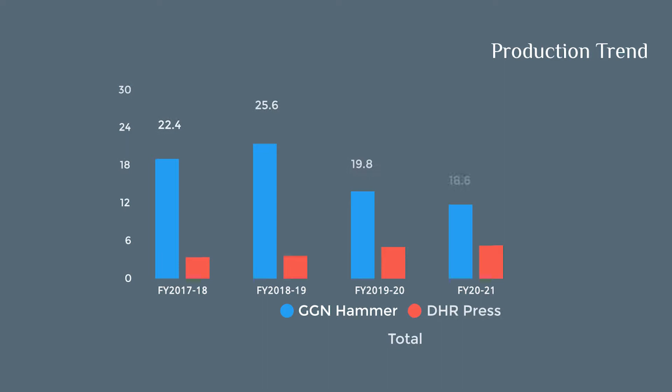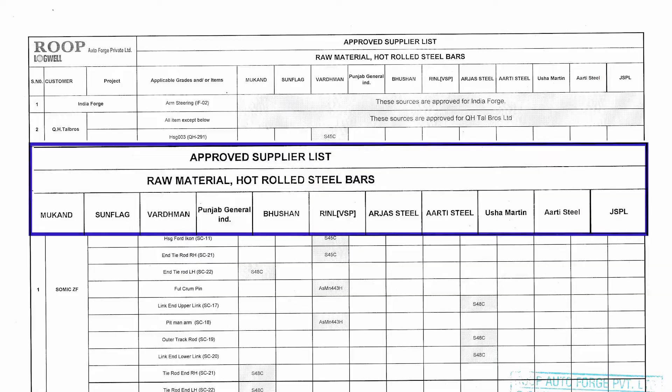We receive raw material bars as per our technical delivery condition from customer approved sources. A total of 30 different grades of raw material is received at Roop Auto Forge for further processing.

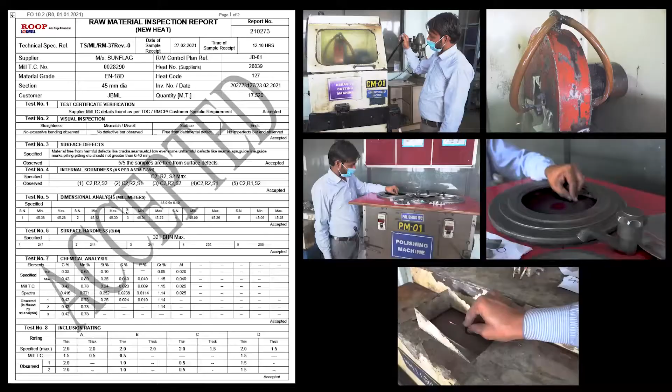Raw material is stored under shed to prevent it from rust. For raw material approval, we are capable of conducting 27 different types of tests. Centralized FIFO boards are maintained for all raw material grade and sections along with raw material stock.

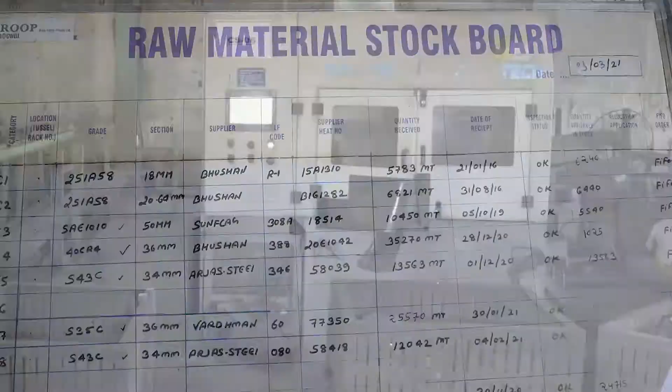Our shearing facility is equipped with 4 shearing presses, a circular saw and a band saw. In-house tool room is equipped with vertical milling machines to manufacture all tools and dies.

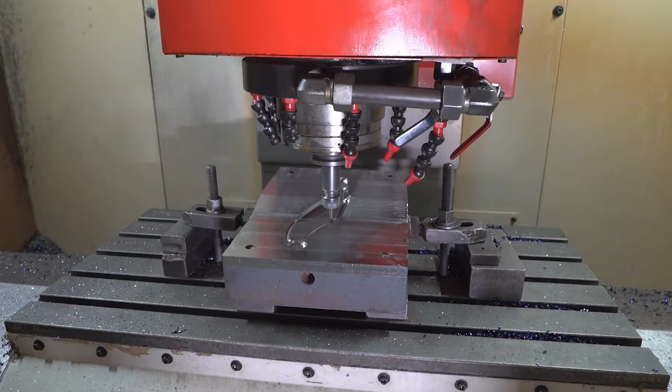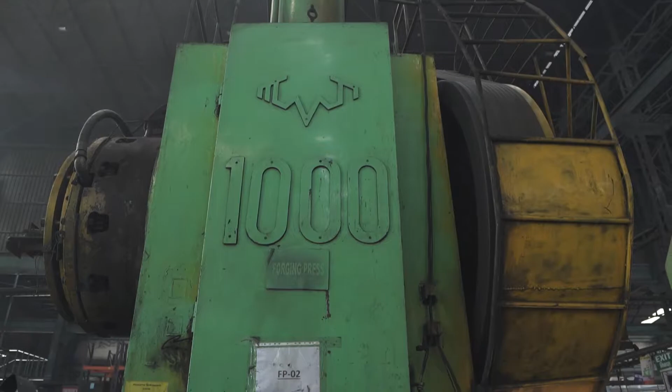Our forging facility is equipped with 5 presses starting from 750 tons to 1600 tons and 7 hammers ranging from 1 ton to 2 ton to cater to different demands of the customer, for a part weight ranging from 60 grams to 8 kgs. Our forging facility is equipped with induction heaters.

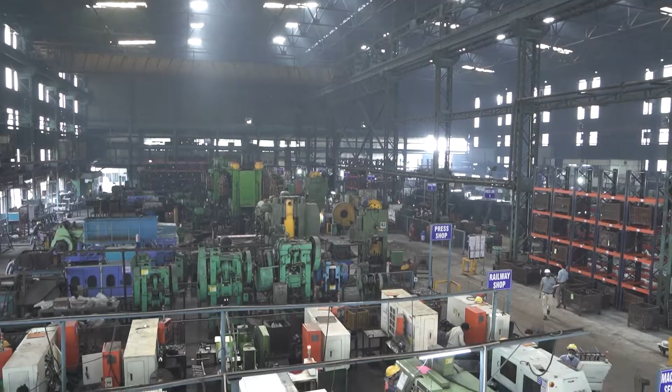After heating, billets are automatically segregated for overheat and underheat using double color infrared radiation pyrometer.

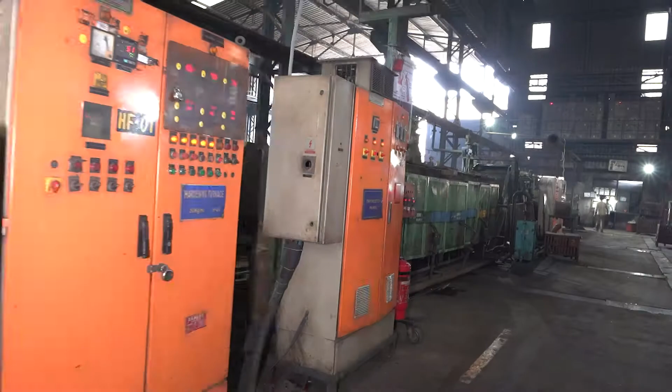We have conveyorized continuous furnace to meet our heat treatment requirements. Our furnaces are equipped with multiple convector motors to maintain uniform temperature inside the furnace.

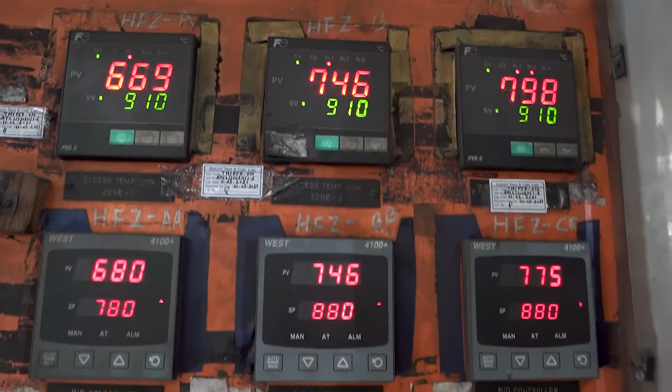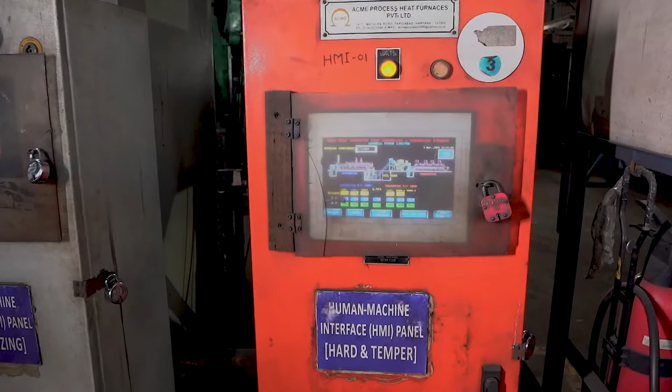In our heat treatment furnace, human intervention is minimized with the help of human machine interface, HMI. It governs and records the furnace operation, alarms and data using 35 different sensors.

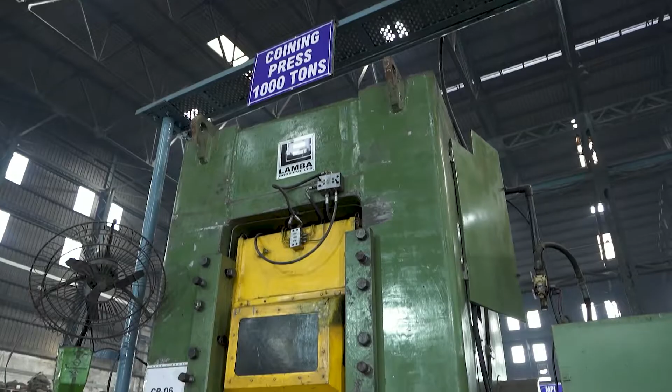Post heat treatment, parts are taken for shot blasting, fettling and coining before they are subjected to final inspection. We are doing visual inspection for crack, underfill, short fill issues, and also conducting dimensional check for OK, oversized and undersized parts.

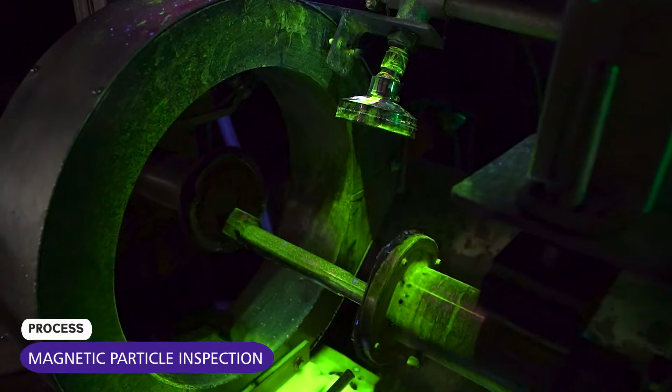All parts produced in Roop Auto Forge are checked using magnetic particle inspection to avoid customer complaints for crack.

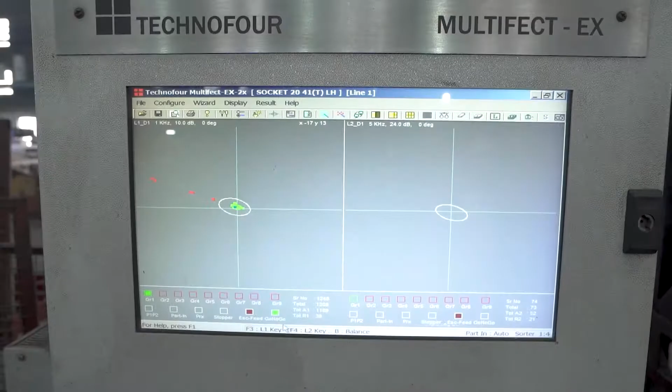We have state-of-art eddy current testing machines with auto gate sorter for hardness, material grade mix-up, and wrong heat treatment. We also have ultrasonic testing facility to detect internal cracks.

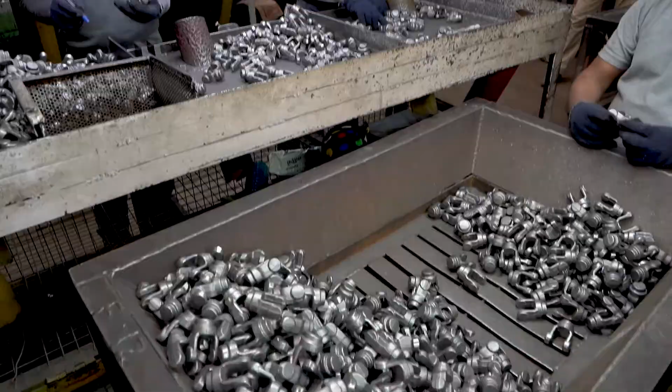Limit samples are used, displayed at required station. Our machining section is equipped with SPMs and CNCs based on customer machining requirement.

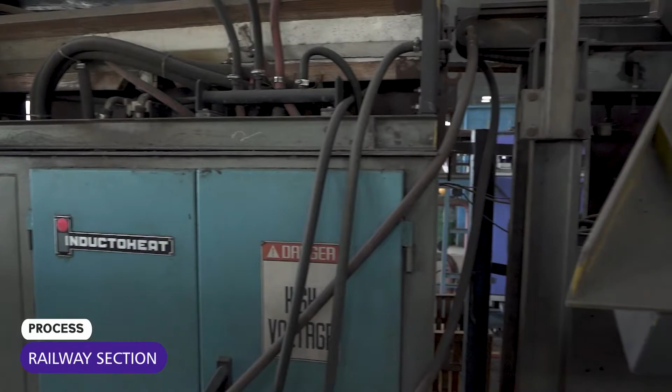We have a dedicated railway clip manufacturing line from where we have catered to Indian Railways as well as international customers like Sri Lankan Railway, Korean Railway as well.

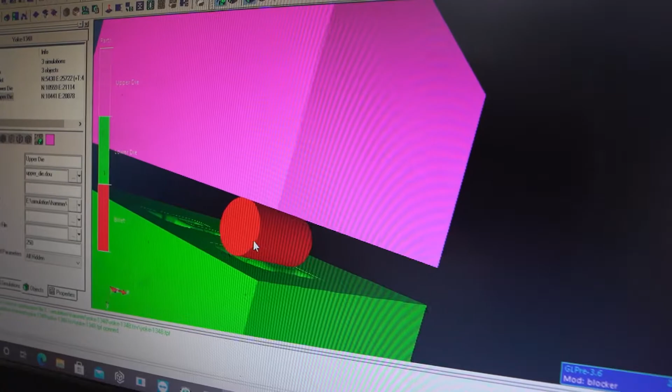We develop 3D models for parts using Unigraphics and Forge 11 simulation software to optimize the die and tool design for smooth grain flow, input weight, and to reduce defects such as underfilling, fold, lap, etc.

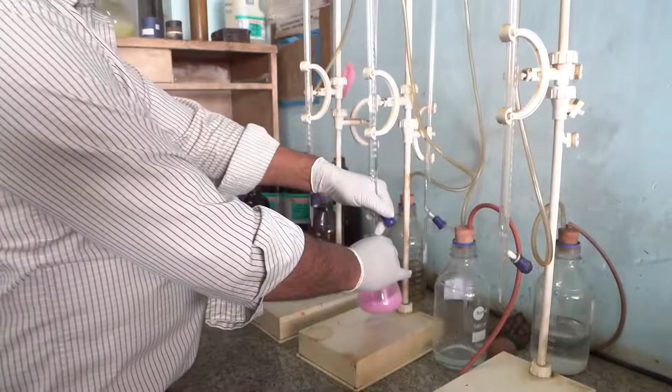Fully equipped lab is available in Roop Auto Forge for conducting destructive and non-destructive tests such as chemical composition, hardness, microstructure, grain size, inclusion rating, Jominy hardenability, grain flow, etc.

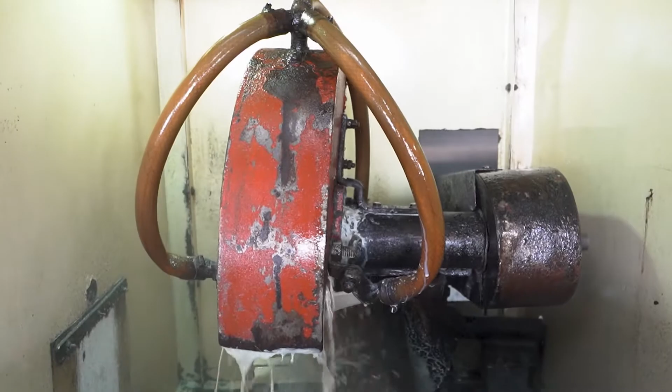Specimens of raw material and heat-treated parts are stored for an identified period and revalidated every year.

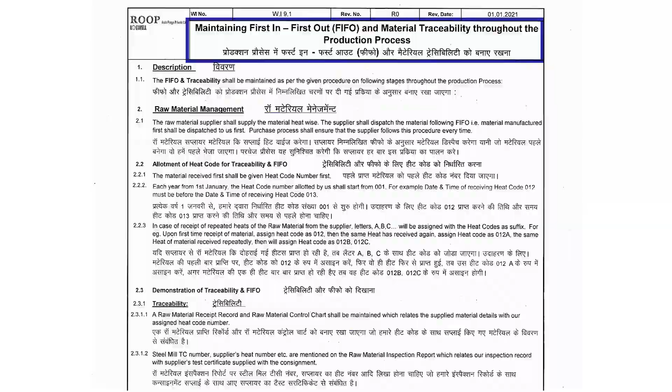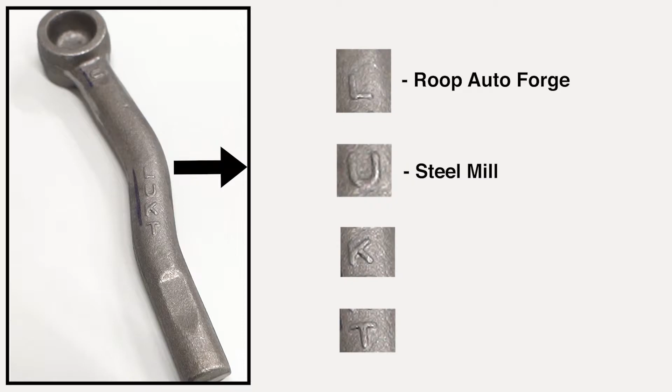We implement part traceability system using letters embossed on parts through dies. For example, LUKT, where L denotes Roop Auto Forge, U denotes the steel mill, K denotes the heat from the steel mill, and T denotes code for production lot sequence.

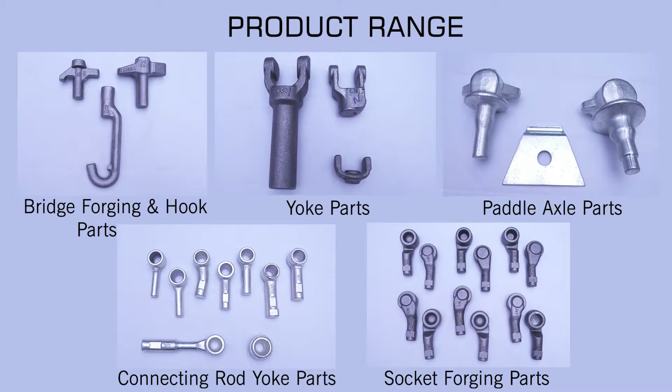We are very thankful to our customers. We are where we are basically due to the guidance and support of our customers. Thank you.